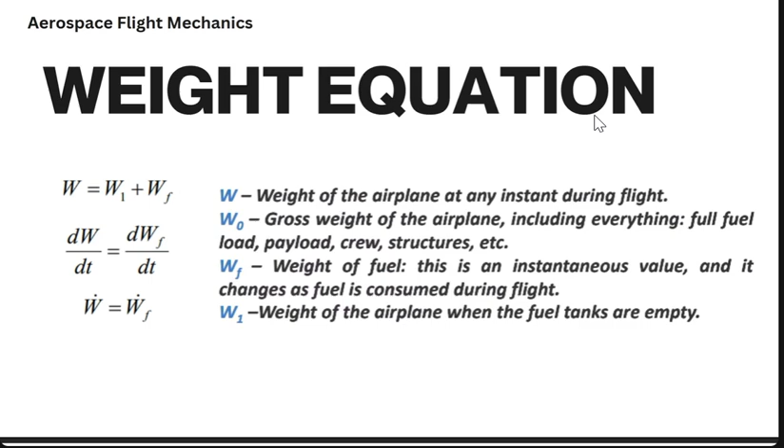Moving on to SFC and TSFC - let's differentiate these two important terms related to fuel consumption. SFC is the specific fuel consumption. It is typically used for propeller-driven aircraft. It represents the amount of fuel consumed per unit power produced by the engine. In other words, this tells us how efficiently the engine converts fuel into mechanical power.

So basically, SFC or specific fuel consumption is for propeller-driven aircraft, while TSFC is the thrust specific fuel consumption, used for jet aircraft. Instead of power, jet engines produce thrust, so the fuel consumption is also measured relative to the thrust output. The key difference between the two is the type of propulsion system - propeller aircraft rely on shaft power, while jet aircraft rely on thrust force.

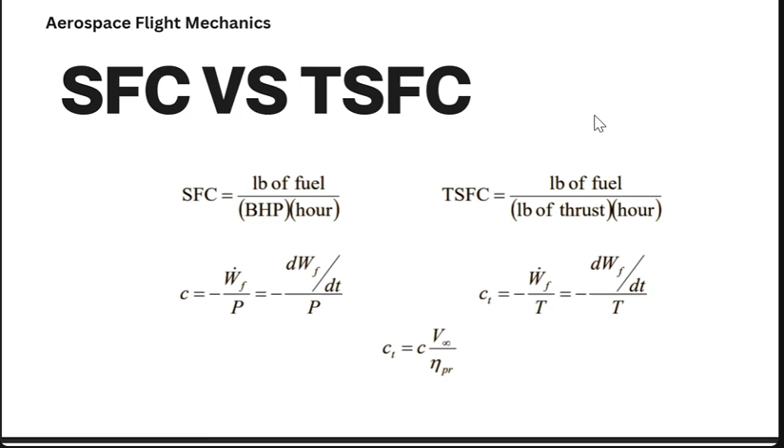It's important to know these two parameters because the fuel efficiency of the engine directly affects aircraft range and endurance, and you'll see that later in our formula. An engine with lower fuel consumption allows the aircraft to fly farther and stay longer in the air.

So for the range ng ating piston propeller, let's start analyzing the range for the piston propeller aircraft. If the goal is to cover the longest possible distance, the aircraft must minimize the fuel used per unit distance traveled. In other words, gusto natin gamitin yung least amount of fuel for every mile na tinatakbo ng isang aircraft.

Aerodynamically, this condition occurs kapag yung aircraft natin ay nagpa-fly or lumilipad at the point where yung thrust required is minimum. So at this operating point, yung drag na na-experience ng aircraft is na-minimize relative doon sa ating propulsion efficiency. So kung ang pilot ay gustong i-maximize yung range ng isang aircraft, ang strategy doon ay to fly at the speed na corresponding doon sa ating minimum thrust required.

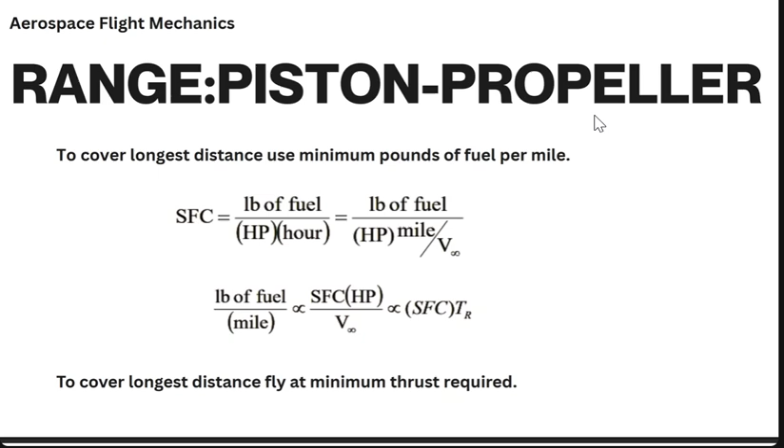So let's just understand yung physics behind this condition. Sa propeller aircraft nga, yung engine natin ay nagpo-produce ng power and then yung propeller ang nagko-convert ng power into thrust which helps or nag-move ng aircraft forward. Because of that, yung performance ng aircraft ay nagdedepende doon sa power required natin para ma-overcome yung ating aerodynamic drag ng ating aircraft. So as the flight speed changes, yung power required curve is also nagbabago.

So there is a particular speed where the aircraft achieves yung best balance between aerodynamic drag and propulsion efficiency. At this point, yung fuel consumption per unit distance natin becomes minimum. And that corresponds to maximum range condition.

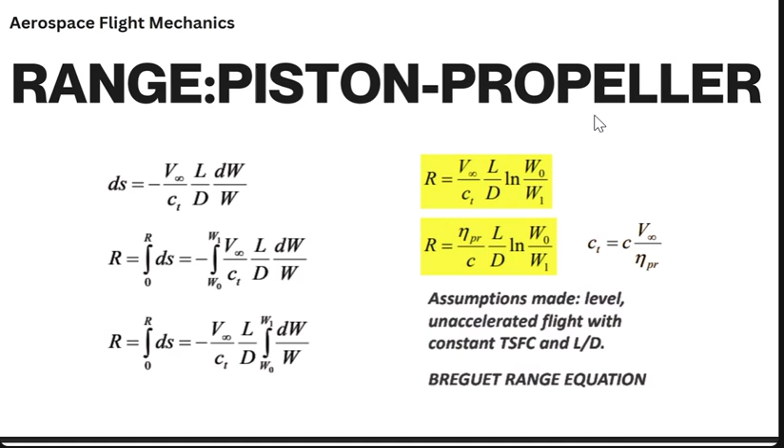So basically, madali lang siya. I-check mo lang yung mga given kung first ay yung mga weight nga, kung directly input mo na ba siya sa weight or kailangan mo pang mag-minus or mag-add. So ito yung ating final working formula.

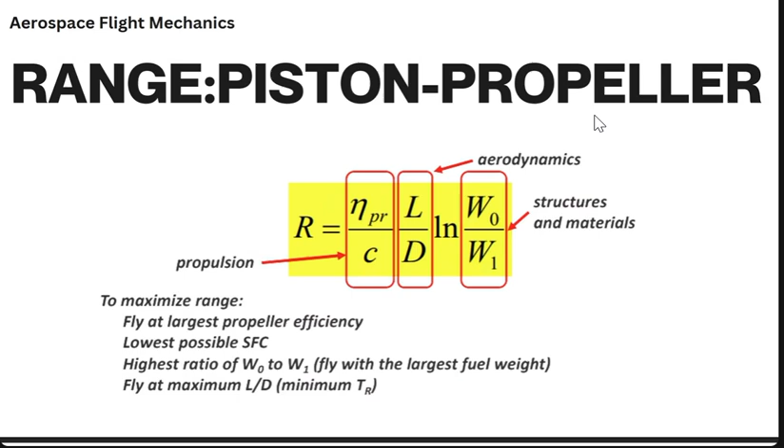And then next ay yung weight of an, di ba, weight ratio siya. So nasa taas ay gross weight and then nasa ilalim ay yung weight ng airplane kapag yung fuel tanks ay empty na. So huwag kayo malilito doon. Kung makikita niyo dito, very straightforward na siya. So saulihin niyo lang yan and then directly input niyo na. Yun lang naman ang ating range.

So, yun yung huwag niyong kakalimutan, yung mga ganong conditions. Tandaan niyo, if maximum range yung kinukuha, dapat naka-maximum din yung lift to drag ratio natin. So, for this example, hindi na natin siya i-compute since maubusan tayo ng problem kasi very limited lang itong mga problem na to. Alam niyo na kailangan niyo lang siyang tandaan.

So, move forward naman tayo sa ating jet aircraft kasi seat work na natin yung ating problem. Don't worry, madali lang yan. So, let's shift na today for our jet aircraft, range ng jet aircraft.

Unlike yung propeller aircraft natin, yung jet engines natin ay nagpo-produce ng thrust directly instead na mechanical power. So, because of that difference, yung equation na ginagamit para ma-analyze yung range natin ay also different. However, yung concept naman niya ay same lang, pero kung gusto natin na yung aircraft natin ay mag-travel ng longest distance, we must minimize yung fuel consumption per unit distance.

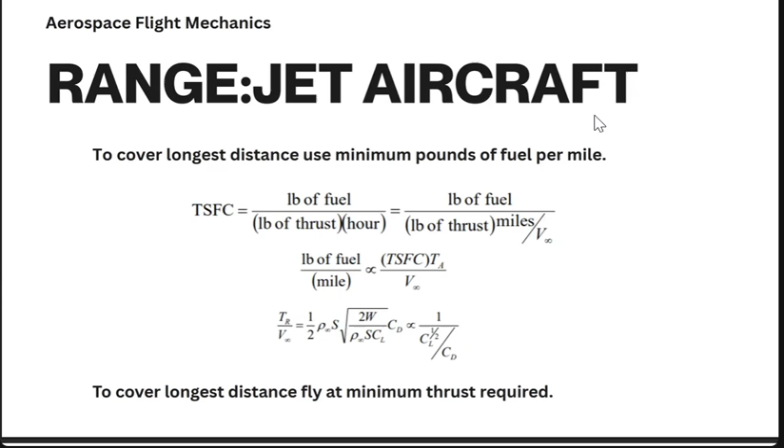So, for jet aircraft, itong condition na to ay nag-o-occur kapag yung airplane ay lumilipad at the speed na corresponding sa minimum thrust required natin. So this is just yung ating derivation, hindi ko na siya i-discuss kasi hindi naman din natin siya gagamitin, pero nilagay ko pa rin dyan. So, for our final formula ng ating range for our jet aircraft, eto.

Yung range equation natin for jet ay makikita niyo, nakadepende siya sa lift to drag ratio, cruise velocity, thrust specific fuel consumption, at weight ratio. So one important difference compared sa ating propeller aircraft ay yung velocity, it plays a direct role in jet range performance.

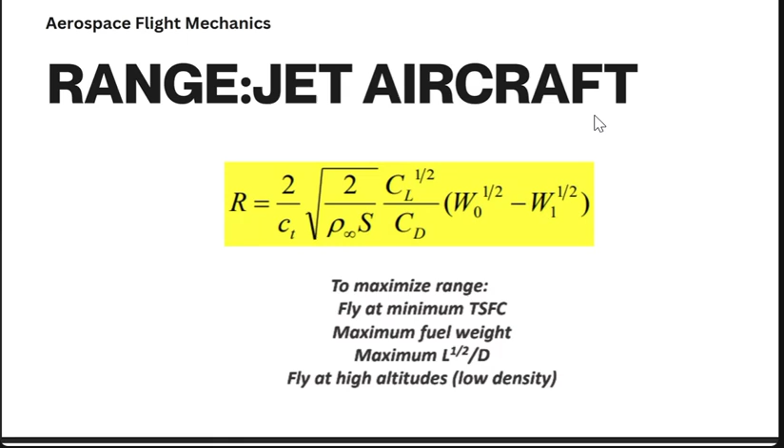So, okay, malilito. Kasi doon sa last prelim natin, sa last exam natin, may mga gumagamit ng maximum conditions kahit hindi siya ginagamit, kahit hindi siya inihingi. So, dito, seat work din natin to.

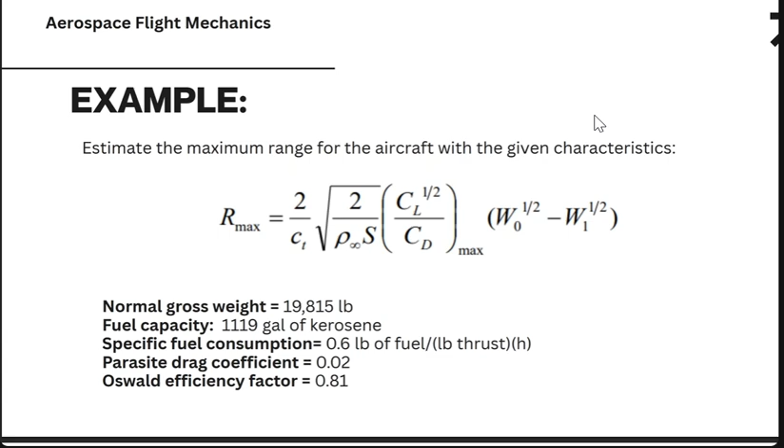And also, alam niyo ba na midterm na pala, midterm na next week? Nasabi na ba sa inyo, na-discuss na ba sa inyo, or nabanggit na ba sa inyo? So, not sure pa sa ating schedule natin, pero next week ay, prelim na natin, midterm break.

Medyo actually, ang magiging midterm natin ay, I think, mas madami siyang computation. Pero huwag niyo pa rin kakalimutan yung ating mga concepts. May mga ilan-ilan na concepts pa rin tayo. And also yung coverage natin ay from the top, from our first topic.

Kasi connected, hindi pwedeng may maiiwan tayo. Hindi pwedeng mula dito lang hanggang, hindi pwedeng range and endurance lang. Laging kasama yun kasi kung makikita niyo naman, yung mga lift to drag, maximum lift to drag ratio natin, nandito pa rin siya.

So, going back sa ating endurance, iba din yung formula natin for our piston propeller, and iba din yun for jet aircraft natin. So, let's move on na sa ating second major topic, which is endurance. Yung ating range, this distance ang pinafocus nyo, and then yung endurance is time.

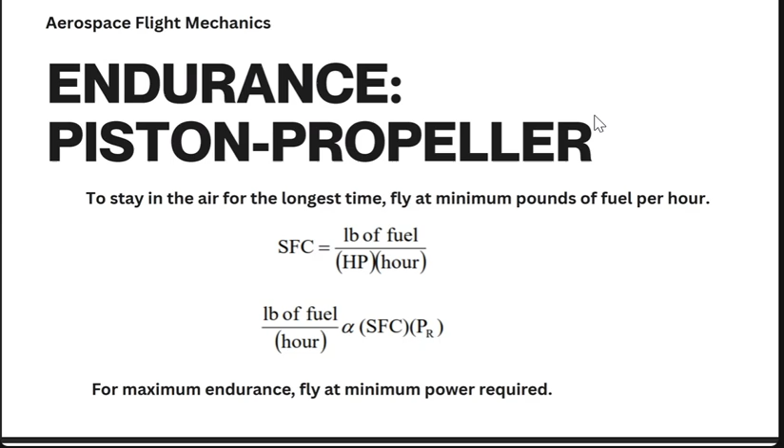So, this is just yung ating derivation. Hindi ko na rin siya i-derive kasi para may time din kayo magsagot today kasi may seat work na. Pero hindi naman natin gagamitin yun. So, just to understand yung concept nitong ating endurance for our propeller aircraft.

So, let's consider lang yung power required curve. Sa low speeds, mataas yung ating induced drag, so doon nag-increase din yung power required. And then, at a high speed, parasite drag yung nagdo-dominate, di ba kasama din siya sa prelim dun sa ating conceptual. So, at high speeds, parasite drag dominates and also nai-increase din yung ating power required. So, somewhere in between these two extreme lines, dun sa dalawang yun, meron doon na minimum power required point.

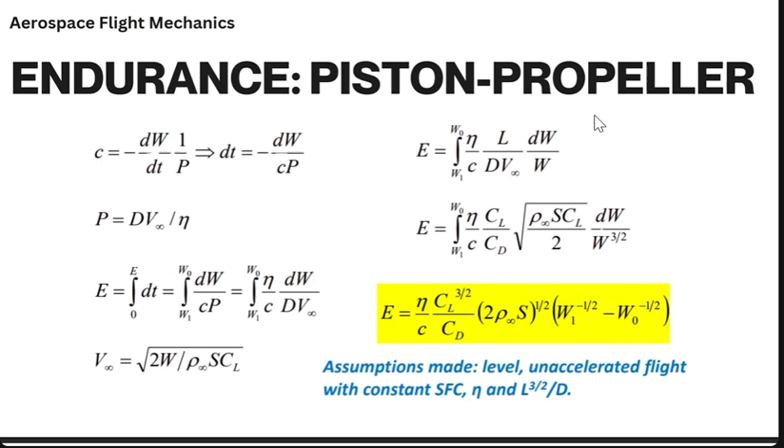So, flying at this speed allows the aircraft to consume the least fuel per unit time, and with that, maximize yung endurance natin.

So for our endurance equation, for our piston propeller, makikita natin dito sa equation na nakadepende yung endurance, depende dun sa ating specific fuel consumption, propeller efficiency, which is yung ating eta nga, at yung specific fuel consumption is the C, at yung ating aerodynamic efficiency and also yung weight ratio natin. So, kapag mas maganda yung ating aerodynamic design and engine efficiency, mas matagal yung ating aircraft na kaya magstay in the air. So, this is yung ating maximum endurance.

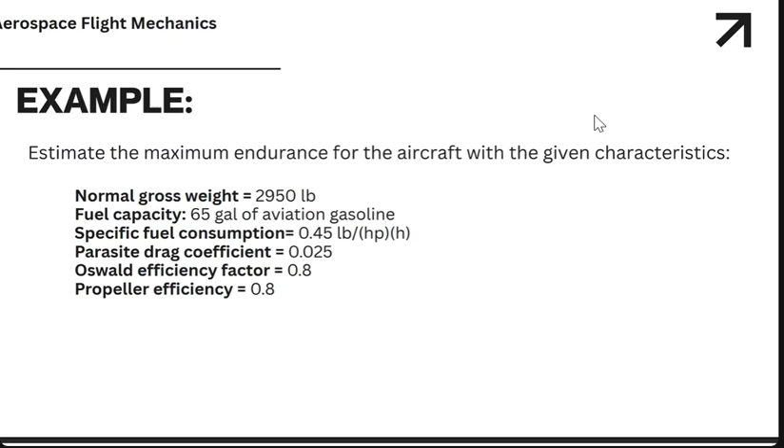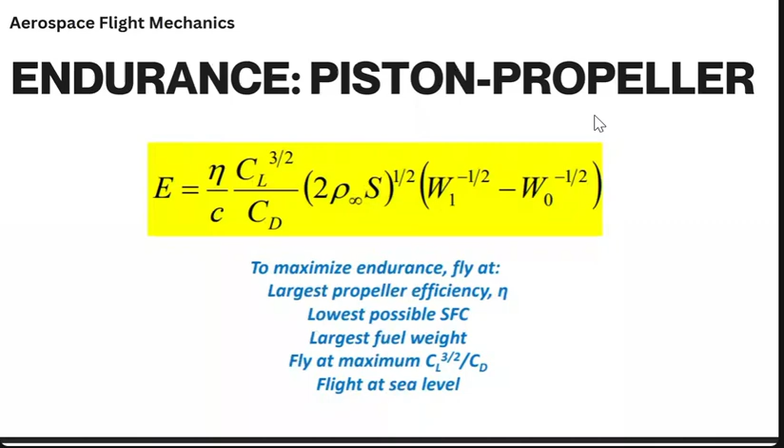Kaya ko kasi siya hindi kinompute kasi very unique yung ating problem sa jet and then sa propeller, para lang na-test natin if nagets nyo ba yung mga kung consider. Yun lang naman yung consider natin is yung different weight, yung dalawang weight, gross weight and then empty weight, at yung ating propeller efficiency and specific fuel consumption. Kapag kasi hindi nyo, pag ako nag-compute or humingi lang ako ng final answer sa inyo, baka tama din na yung ibang mag-try mag-compute. So, kaya ko siya ipapaseat work, at kaya, para din matry nyo.

So, pag kunwari nag-midterms tayo, familiar na kayo or alam niyo na yung gagawin, kasi mamaya baka magulat kayo. Saan galing to? Nasaan yung specific fuel consumption? Ano nga yung C? Ano nga yung ganyan? Kaya gusto ko, kayo yung mag-resolve niya.

Kagaya din sa ating prelims, hindi ko rin alam kung bakit yung iba hindi nasagutan yung ating problem dun. Actually, nandun lang din yun sa activity. Make sure na hindi kayo mag-focus sa concept lang or sa formulas lang. Try nyo, kahit isang try lang ng pagsasagot. Ganun lang sa before eh. Before, pag nagta-try ako magsagot or nagre-review ako for exam, isang beses ko lang siya sasagutan. Lahat ng problem sasagutan ko lang siya isang beses and then pag nasagutan ko siya, alam ko sa sarili ko na na-gets ko siya, so hindi ko na siya kailangan paulit-ulitin. Sinasaulo ko na lang yung formula and then iniintindi ko yung concepts. Gano'n lang naman siya.

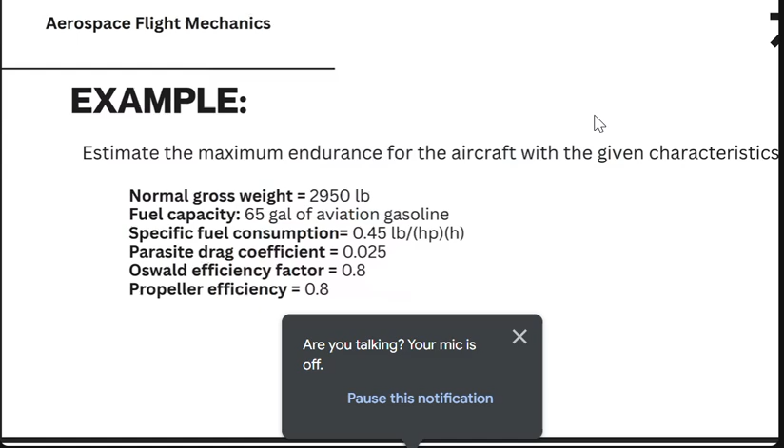Moving on sa ating endurance ng ating jet aircraft. For jet aircraft, yung analysis ng endurance here is nag-follow siya ng same principle. Ang different lang is yung equation, nagbabago siya dahil nga dun sa ating nature ng jet propulsion, kagaya ng sa range. Kung ang goal is to minimize yung ating fuel consumption per unit time, para mas matagal siya sa air. So for jets, yung conditions sa ating endurance is nag-occur kapag yung airplane is lumilipad at the speed corresponding sa ating minimum thrust required.

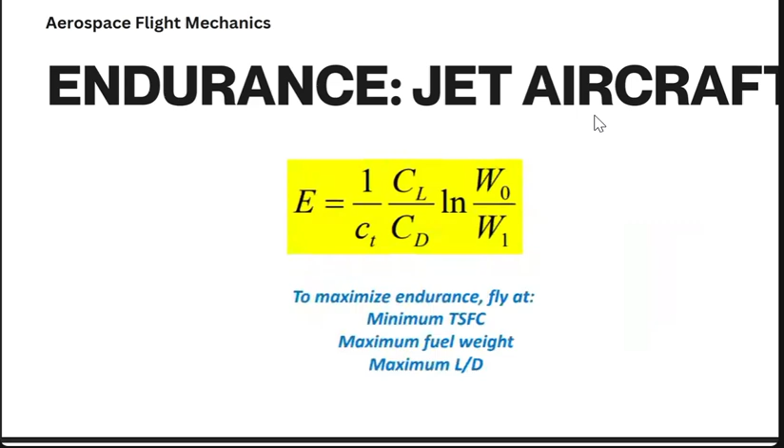May yes, Aliyah Margaret: i-convert ba po muna sa SI units po bago po i-solve? Since ito naman ay hindi naka-SI units, naka-English units naman siya lahat, so hindi mo na i-convert. As long as wala naman akong hinihingi dito na specific unit. Kung given ay English unit, edi English unit na lang din yung ating, English unit. Pero pag seconds naman, makakancel lang naman din siya. So just make sure na makakancel niyo yung mga units kapag wala akong hinihinging specific na units. Para sa mga problem na to, wala naman, kung anong given lang. I think English unit to lahat, so English unit ang ating final answer. Thank you po.